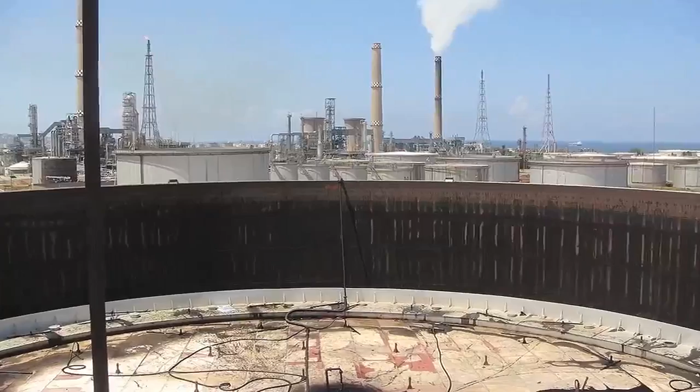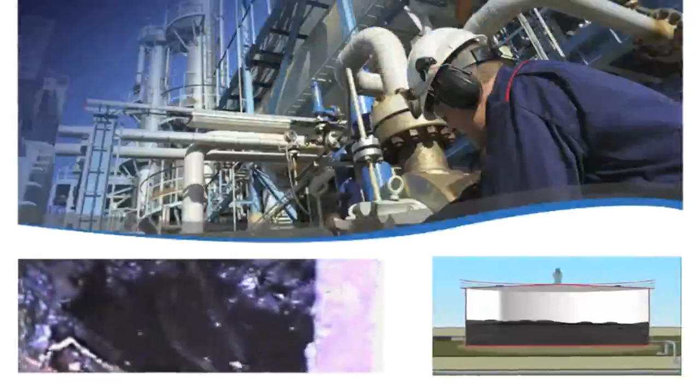The crude oil stored in the big tanks produces deposits from precipitation and settling of the heavy parts of the crude oil, such as paraffins, asphaltenes, and other materials. When this polymerization associates with the sedimentation materials, it produces sludge which is very heavy and hard to be mixed and fluidized, so not recoverable.

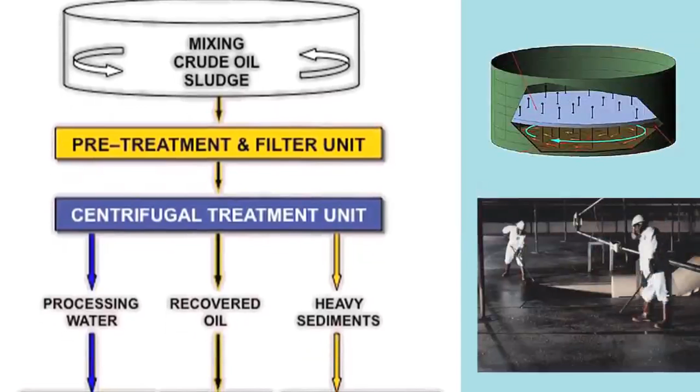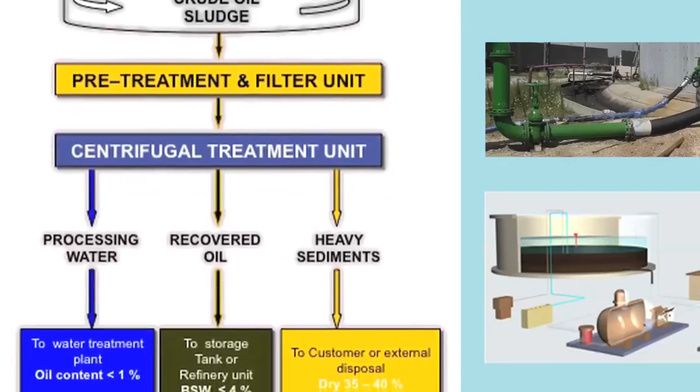All the systems of sludge mixing and fluidization existing in the market have some limits of process or installation, so they are optimal only under special circumstances. Each technology has the aim to fluidize the hydrocarbons imprisoned in the other materials in order to recover them and then have them processed and refined.

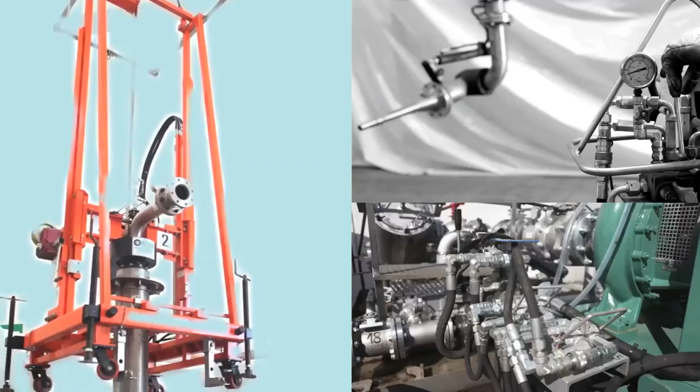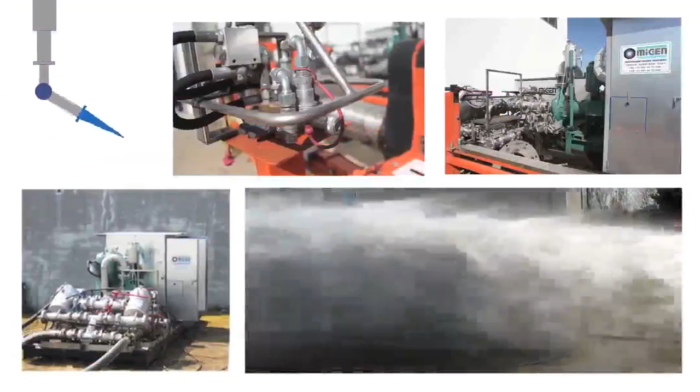Like the crude oil jet mixer system, the system is based on the disruption property that a fluid crude oil flow produces when it impacts a sludge with a specific energy due to the crude oil mass. The sludge can be decomposed through two systems: great liquid flow rate sent with low pressure, or low liquid flow rate sent with high pressure.

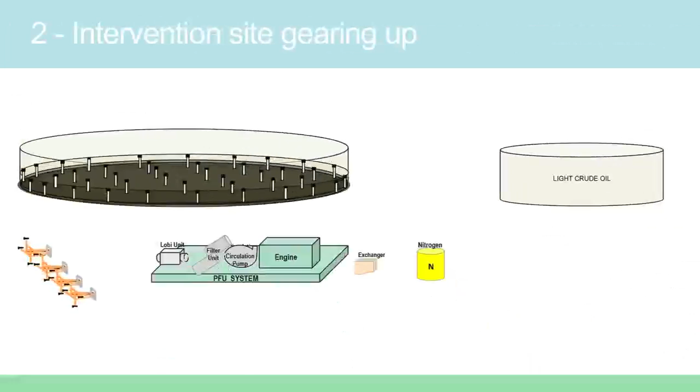Mixing is obtained by introducing jets into the tank through the ducts of the floating roof supports, removing the same supports, an existing nozzle or manhole, a nozzle obtained by cutting the floating roof, or a manhole of the mantle.

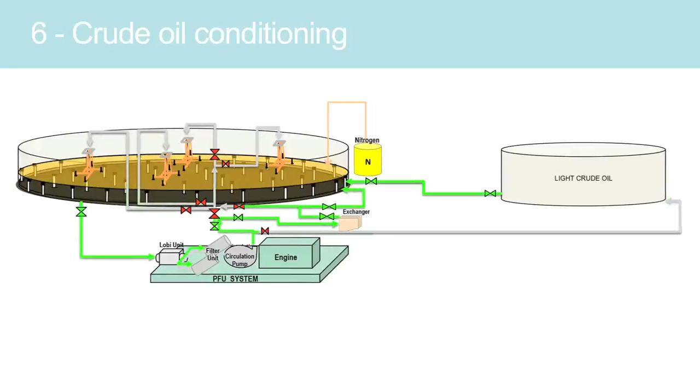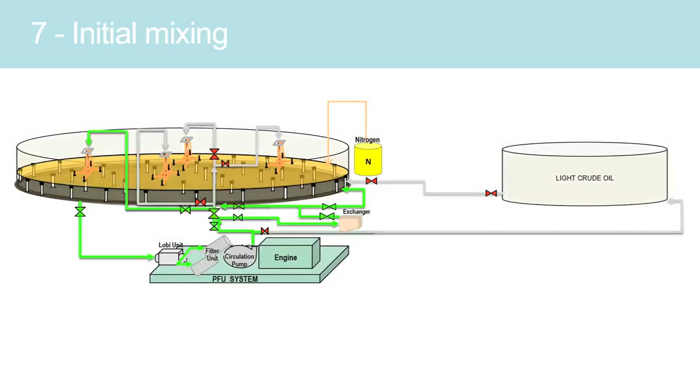The system is particularly effective when it comes to mixing the sludge of crude oil at a temperature below 30 degrees C and for tanks with diameters of up to 50 meters. For tanks with a larger diameter, it's recommended to install 4 jet systems, essential to speed up the mixing time and get the most efficacious treatment.

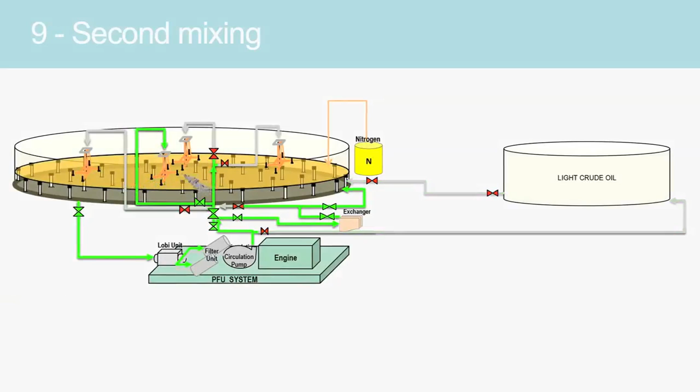This system is able to produce a flow rate of 250 cubic meters per hour at a pressure of 9 bars, capable of simultaneously supplying 2 mixing systems, capable of delivering jets at 9 bar with a flow rate of over 100 cubic meters per hour, which generates a range longer than 25 meters.

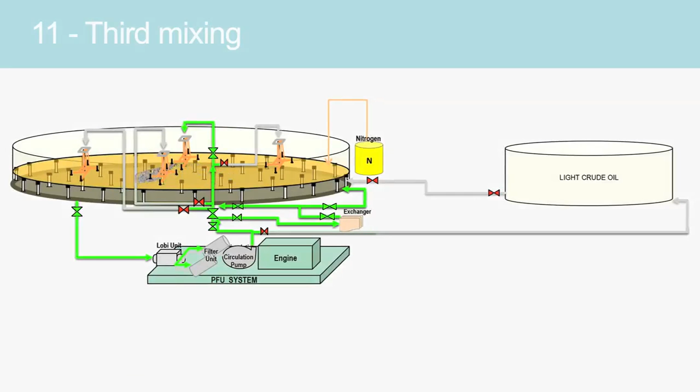This technology requires that the empty space existing between the sludge level and the floating roof is filled with nitrogen until you get a presence of oxygen in the air lower than 8%, to prevent ignition due to potential electrostatic charges generated by the jets. This would be dangerous if it generated an environment with an explosive mixture.

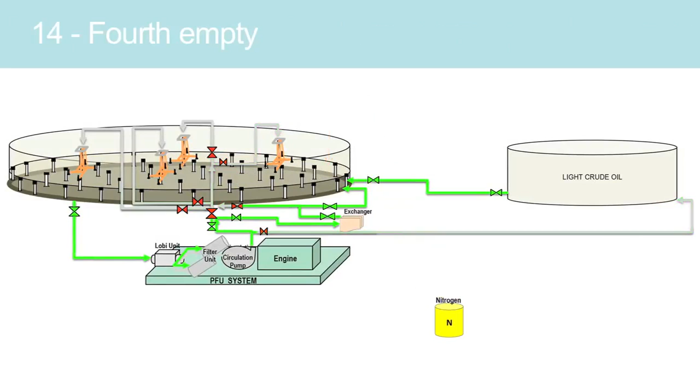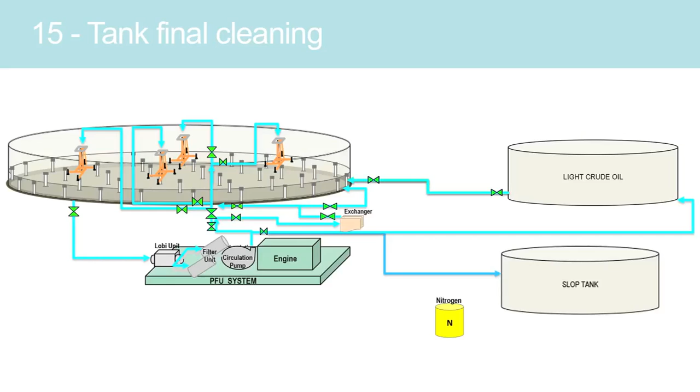An interesting merit of the jet system with large and long-range effectiveness is that it can mix a level of crude oil sludge and liquid up to 70 centimeters by mixing the entire mass without subsequent intake of crude oil fluid, because the strong power of the jet allows it to move also the semi-solid sludge lying under a mass of fluid. Migen SPA designs and produces systems and services respecting workers' safety and the environment.